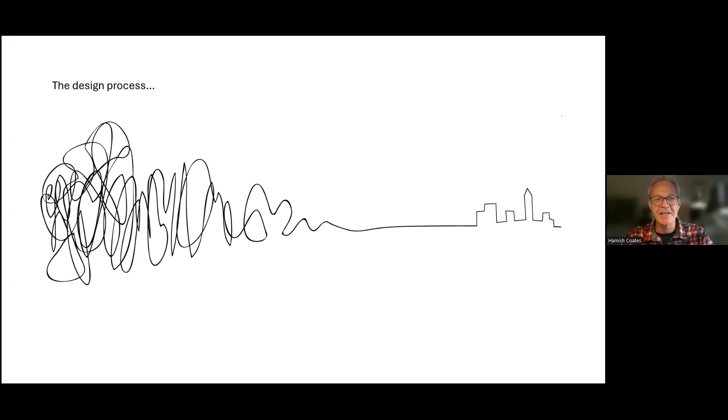So this first slide, I think you'll all agree represents a state of mind, this squiggle. This represents the brain, and the thinking about how the design process works. Initially, on the left side of the diagram, it's this scrambled mess of like, I know what I don't like, but I don't know what I want. After you work through it, you have an outcome.

If I could go to the next slide, please. So what this really means is that the first bit is about understanding your site and knowing what it is, discovering what you can and can't do, and researching how you might go about doing that. As you move through the discovery phase, it becomes clearer because your research and concept really start to tell you what you can and can't do. And so it evolves into this design process about actually putting pen to paper and working out the logistics and the machinations behind creating this development.

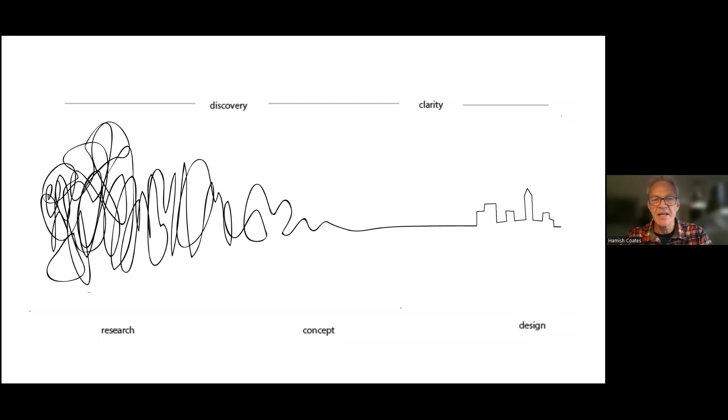Next, please. So before we can actually start designing, there's a few little things to think about, and these are all in no particular order, but they're just prompts to help you understand what kind of project you're trying to deal with.

Is it a large project? Is it a medium one, or is it a small one? This will determine a lot about the future engagements you might need to do, the types of things you need to think about, and the budgets and obviously the time limit about how that might unfold.

If you like GMCT, then you'll have a procurement policy to deal with, because it's an obligation for us, a statutory obligation, and this is all just about good governance and how we control the machinations of the project. Obviously we're not just doing this in isolation. We're serving a community, and we have responsibilities towards that, plus the organisation as a whole. So we want to make sure we're ticking all the boxes in the right way, and being accountable and responsible for the outcomes of spending the public's money. So governance is a really big thing about how we might do this.

So we set that up with a project working group, which is pretty much an internal group that deals with the nitty-gritty and the nuts and bolts of the project. And then we also elevate any issues and decision makings to a project control group, which can help us move from one phase to the next, making sure everyone's on the same page.

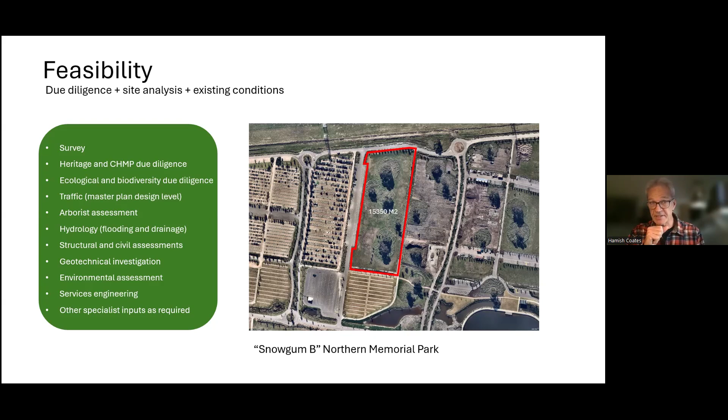So in order to do this, on this particular project we modelled the site. This is just a computer model, and I won't get too technical about it because quite simply I don't know how to - my former colleague did this for us, and it was a really good model.

So we set up the site in 3D. We've got some contours going from the top of the page north down to south. Those arcing circles with black outlines represent the trees and the tree protection zones. The area is called River Red Gum, with pre-settlement mature river red gum trees, so it's really important we try to preserve those as best we can, and work out how to work around these non-negotiables to study the land.

Brendan, I'm not sure if you've got the ability to click the play button at the bottom of that slide - there you go. If you can drag the slider through, it goes a bit quick. There's a soundtrack I couldn't get working on this, but I'll try and explain it to you.

This just describes the parameters of the site. As I mentioned before, the tree protection zones, there's the north at the top of the page, and water generally flows from top to the bottom of the page.

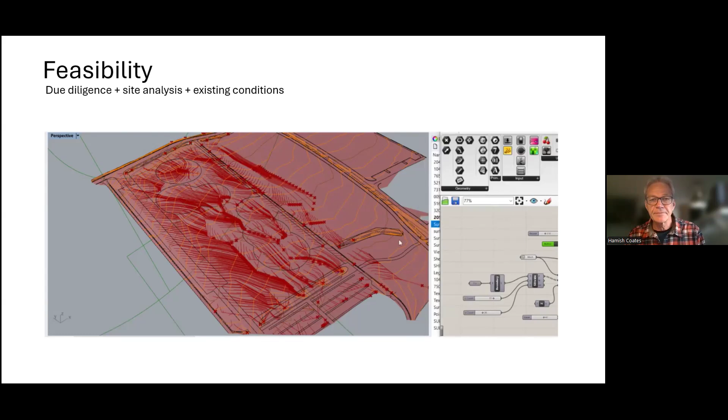Yeah, there we go. So knowing all this and the feasibility and the water authorities, we've come up with three different options about how we might approach this. So these are really high-level conceptual approaches. We've got the first solution, which is to structure the design around a natural swale system.

We've got a second option about filling in the natural depression and creating more opportunities for grave space. As we know, land's at a premium, so our obligation is to try and maximise the number of burial opportunities, maximise the yield on site. And our third option is to do that with what we call grey infrastructure, in the usual way that we've always done it, which is with pipes and pits, curbs and channels.

But there are pros and cons and pluses and minuses behind all those opportunities. From a construction cost point of view, the natural swale system is the cheaper option. From a number of graves opportunity, though, we know that solution has the lowest yield. However, from a cost-effective point of view, the traditional approach of using pipes and pits, curbs and channels produces a greater yield, but really, in the scheme of things, it's only 75 more graves that we can work out. So we have to weigh up, is it better to be cheaper with fewer opportunities? So it's a sliding scale, and it's just an assessment really of what the most optimal way of doing things is.

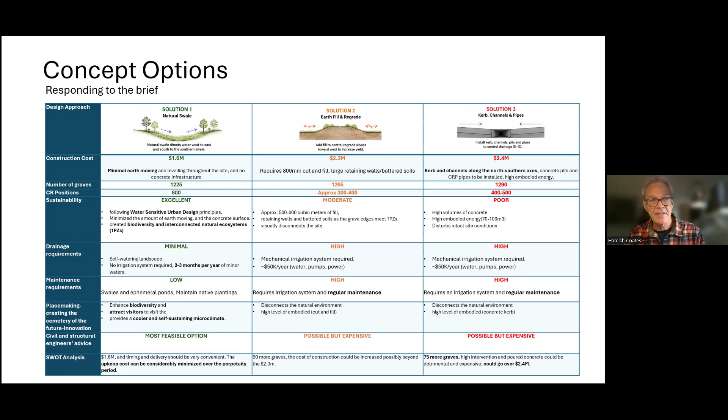And so it turns out that option one here, this natural overland swale system, was the most feasible option. Even though it had the lowest yield, it was relatively negligible compared to the costs and complexity of employing the other two options. So if we go to the next slide, please - so we've taken option one.

We've taken that through the governance process, argued why we believe this is the best option, and had that approved. So we can move on to a more detailed conceptual analysis about how we want to develop an area specifically with garden headstone products.

So why did we choose garden headstone? We know it's a really good product for us, it sells really well, and in River Red Gum there weren't any real opportunities that existed at the moment. This particular site was in the middle, sandwiched on either side by grave infrastructure, which is monumental graves. They're a less green, I think, grave type.

We thought from a placemaking point of view and the site overall, it would be good to alleviate and relieve the site of this very harsh kind of environment that monumental graves promote. We thought we'd put a more greener, more landscapey option in between. So it's based on product - the decision was based on what kind of product we wanted to use and how that might work best in the context of the existing site.

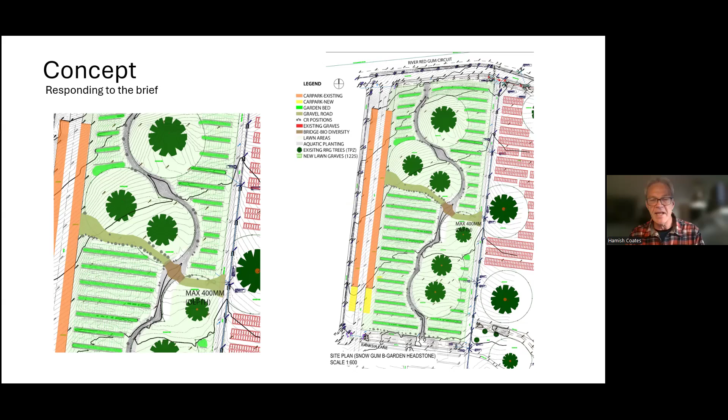If you go to the next slide, please. So this is what it looks like in section, and give you some idea of scale.

So on section 2, through the main swale, that's the grey squiggly area - that's the main swale that carries the water. And on the right side, section 1, you can see there's some concrete beams between a garden bed, a low garden bed with the swale in it. So where you can see that fellow on the right side standing, that's where the grave is located, and the headstone fits on top of that concrete beam.

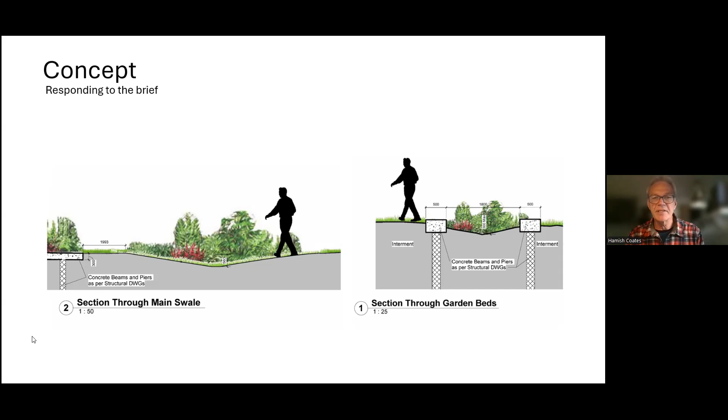So if you go to the next slide, please. So with this design approach in mind, we ran it - if you can hit the play button again, thanks - back through this model to see what happens with it, and you can kind of see the same thing is happening now, but in a more controlled way through the garden bed swales and into the main swale. But it still follows the same logic and the same feel as the site as it functions undeveloped.

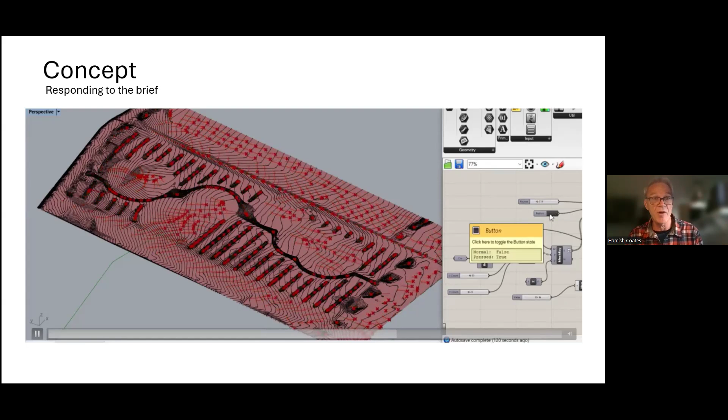So it means we're just using the natural lay of the land to help us make a more efficient drainage outcome that also can help irrigate the landscape and provide a more low maintenance development. This kind of computer modelling is really beneficial for us, and we don't always do it, but in this particular case we felt like we had some really good opportunities to test this out.

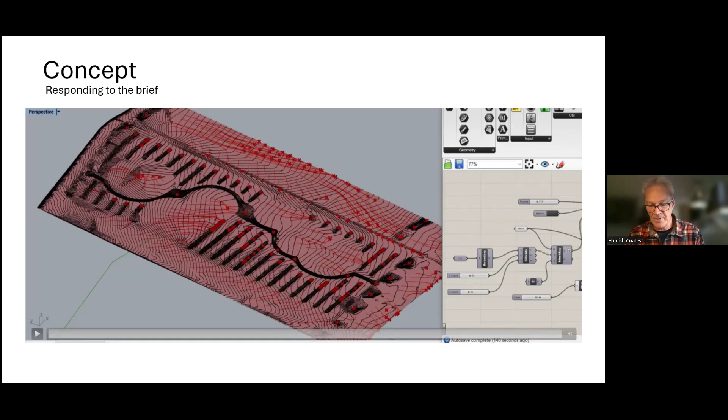So the result is, it's all good. We think this is going to work, and we've tested it as much as we can. It's a concept that conforms to the parameters of the stakeholders, the client brief, the feasibility and due diligence exercises. So we feel like there shouldn't be any real surprises - that's why we decided to pursue this particular project.

So after the concept stage, if you go to the next slide please, Brendan, we go into this thing called design development.

So we've got the concept. Everyone's really happy with the approach, which defines the concept and the general arrangement. Now we have to get into working out the details, the nitty-gritty of the design.

So if we're going to design a swale that directs water into a main swale, how big does it need to be? How long does it need to be? What kind of plants need to be helping us do that? What kind of public amenity do we need to include? Where are the egress and ingress points? How are people going to get around the site, the access, the movement? Do we need bridges? If so, how many of them? What kind? They need to be engineered and constructed.

So we have to design all these little aspects right down to pretty much the nuts and bolts on all elements that we want to have in our cemetery.

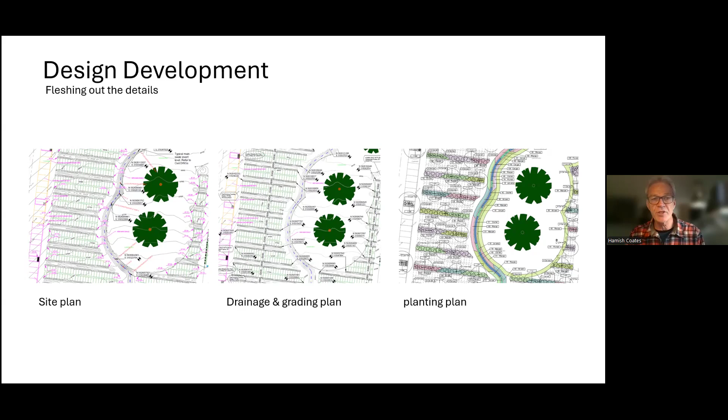Fortunately, we have a number of design standards that we can fall back onto. They generally represent the different types of grave infrastructure, and so we've had those engineered and approved, and we just pick and choose what kind of design standard we need for what kind of application. So in this case, it's a garden headstone, and we have an engineered smaller concrete beam that the headstones can sit on, and we'll work with that as a standard.

On top of that, we've got to think about all the other tiny little aspects. How does the grass meet the gravel, for example? What kind of edging, the thickness of the pathways, the width of the pathways. Does it provide enough opportunity for our burial operations gang to manoeuvre their vehicles in? Have they got enough space for the bucket to lean over and dig up the ground when they inter a body? So there's a lot of negotiation at this particular point.

There's a lot of discussion, there's a lot of conversation, and a lot of collaboration and consultation, a lot of C words in there. This is something that goes pretty much round and round and round and round till we think we've got it right, and that we're satisfying as many people's expectations as possible.

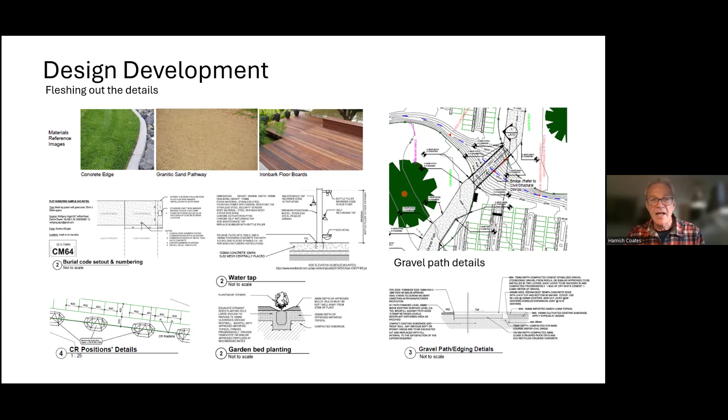Once that's achieved, at the design development phase, just prior to this phase, we'll put it back through the costing and find out if it's achievable from a budgeting point of view. It has to go through our finance department, and they put a fine-tooth comb over that one to make sure that whatever we're proposing is in fact giving us a return on investment that works out our net present value as a positive outcome to make the project viable from a financial point of view. That's a really, really important part of any of our projects progressing.

So it's not uncommon for us to go back and redesign some aspects and value manage the outcome because it's just simply too expensive or too large or doesn't have enough grave infrastructure that we can justify the current design. But once we keep finance happy, we can then move on to the next part, which is the green light to actually prepare the documentation and take it to tender.

So we take the design development drawings and we package them up into a set of tender drawings. These are really highly detailed drawings that explain absolutely everything about how you build that particular project. It's a number of drawings and a technical specification that goes down to the strength of the concrete, the type of acidity in the soil that we expect, all the different kinds of plants, the specification of the bench, the drinking fountains, the rubbish bins, the bridge.

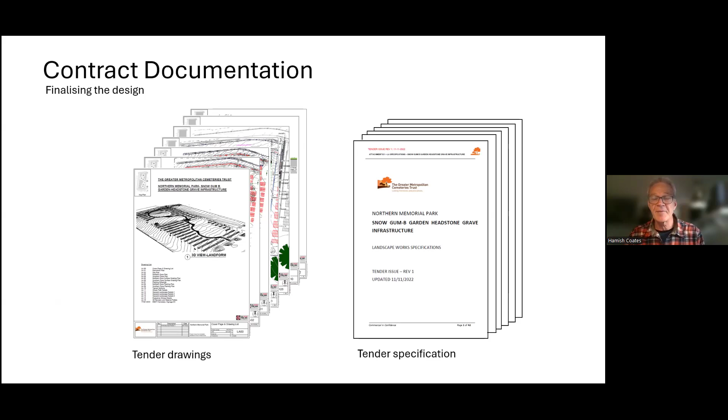So that's where Julian's really going to take over. But I've got a couple more slides before he jumps in and preempt his work.

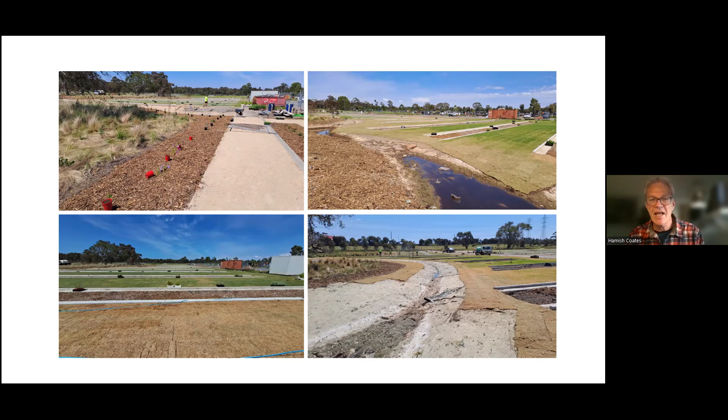The importance of the vegetation helps promote the biodiversity, and what we want to create is really a living landscape. So when people come there, they're not just surrounded by death, but reassured by the fact that life goes on, and defined by the type of environment that they're sitting in.

Here's just a few more pictures of the constructed outcome. So you can see the lawn areas where the interments take place, and the headstone beams and the garden beds and shelters.

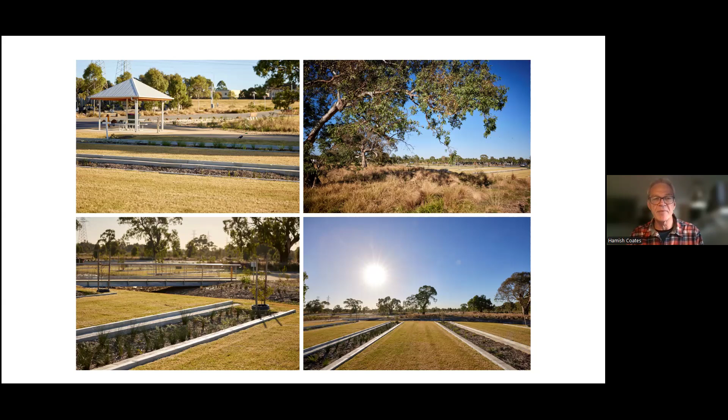So I think that's it for me. I hope that's given you some indication of the types of things we think about. It's a pretty complex operation, but highly rewarding, particularly when you can see a built outcome. So thank you very much.

I'll pass on to Julian now, who can explain how he takes my dreams and turns them into reality.

Thanks, Hamish. So I'll step through the general process we follow for project delivery at GMCT and try and add some learnings that we've discovered in the past. Feel free to jump in at any stage to ask questions, or if you'd like further elaboration on any point. So after we get the detailed design documentation from Hamish's team, we go to procurement.

At GMCT, our process for projects larger than $150,000 is to complete a formal tender process to find the right contractor for the job. This involves completing documentation, which includes conditions, drawing and spec, draft contract, a response form, and pricing schedule. All of those assist in consistency of responses, so it helps us compare apples with apples as opposed to comparing apples with oranges.

We then complete a confidential evaluation process, and we end up with the most suitable contractor for the project. That's for the bigger projects. For smaller projects, we run a much shorter process, typically receiving 2 or 3 quotes, and we assess them and confirm that the scope is correct. The main point is normally to check the exclusions or departures to ensure that the expected work is going to be quoted accordingly.

Throughout the procurement process, whether it's large or small, it's normally the best time to identify any requirements or expectations, and that includes safety - requesting things like SWMS and JSAs that are required for the job, informed conditions such as tools down for nearby funerals, and call for identification of subcontractors, so you know which work is being completed in-house and which is being outsourced. That's the best time during procurement to call out all the things that are required, as opposed to awarding the contract and then trying to call those things out afterwards.

Nothing. Brenton, Hamish, anything to add?

It's a long process, generally speaking, and people think that well, particularly design is just about drawing rectangles on a bit of paper, but it's so much more than that. I hope I've demonstrated why that is, and also it's a key relationship for us designers to work with Julian's team in order to make sure that the design is tracking according to the tender documentation.

But invariably there are so many issues that happen. The drawings and the design that the contractors follow is about 80-90% theoretical, and a significant part of that has to be modified as the building process unfolds.

So it might be that we discover something we didn't know about, or something needs to be changed, or more recently, because of the global conditions, the supply of materials is not always as we thought was available when we specified it maybe 12 months earlier on a project, and certainly the costs are escalating in an uncontrollable way.